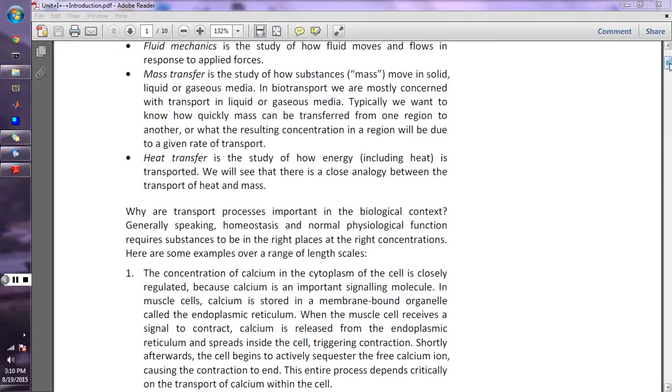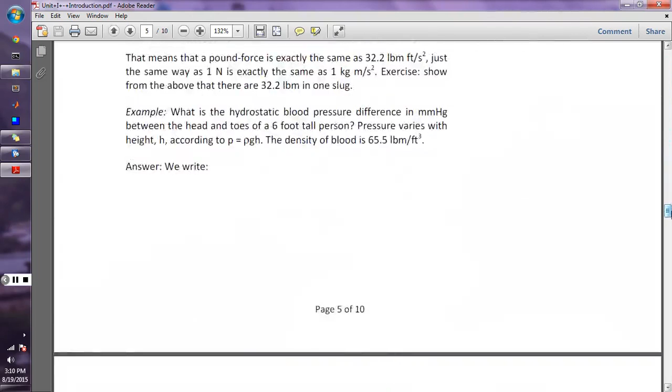Yeah, I'm doing it, yeah. Okay. All right. I was just doing it off my computer screen. Like, you can't see the annotations that you make, but you can see them on the camera, right? A little bit. I mean, not that well? Not that well, no. Oh, really? Yeah. Oh, okay. Yeah, I didn't do very much annotation yesterday, so maybe I'll try to do a little bit better job of that today.

Because I mean, it worked really well, I think, last semester when we did it from your tablet, but I feel like right now it's really far away. Yeah, actually, I'm not that crazy about this room. There's this thing that's kind of like a barrier between me and the students, I feel like, which is a little bit weird. Well.

It's just like tensors. Right. Must love tensors, right? They're useful. Actually, this is about as far as we're going to talk about tensors in this class. And that's about it. But for biosolids, trust me, we're going to talk more about tensors.

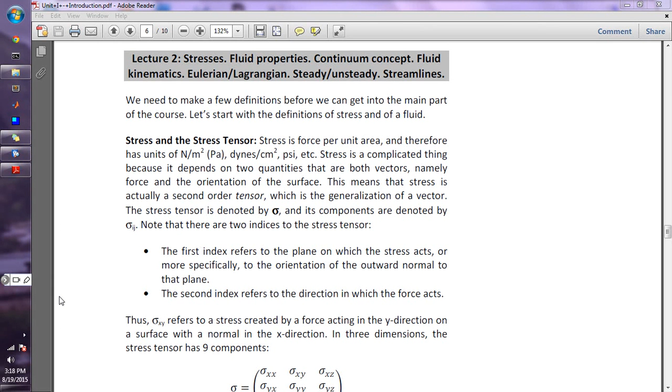Okay? So right away, we can kind of subdivide this stress tensor into 2 parts. The first part are these guys here. Notice that they have the same subscripts, x x, y y, z z. Those are stresses where the force and the area are in the same direction. And we call those normal stresses, because the force acts normal to the surface.

And then all the other guys, so these off-diagonal elements here, those are called shear stresses. And the idea is that the force is not acting normal to the surface, but it's acting tangential to the surface, right? So quick question. When I push down on this desk like this, is that a normal stress or a shear stress? Normal, right? When I slide my hand across the desk like this, normal or shear? It's shear.

And whenever you see something about a stress in this course, I want you to ask yourself a question. Is this a normal stress or a shear stress? Because they're different. Usually, in fact, for us, always, shear stresses have something to do with friction. All right? Normal stresses, not so much. Okay, questions about that? You experts on stress now? Stress tensor? Okay, awesome.

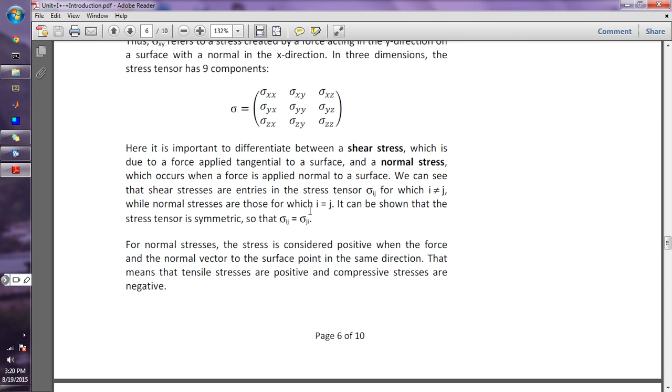Okay, what's a fluid? This is always a hard thing to define, right? The usual chain of logic goes like this. A fluid, what's a fluid? A fluid is something that flows, right? What's flow? Oh, it's what a fluid does. Perfect, that was easy, right? It's always good to have a circular definition. It's internally self-consistent, but ultimately unsatisfying.

Question, ma'am. Oh, I was going to answer. Oh, tell me. It sustains a rate of deformation. Sustains a rate of deformation. Explain that a little bit more, please. Oh, wait. Never mind, sorry. No, you're real close. You're doing awesome, actually. Not entirely sure how to. Okay. Anybody know? I mean, it's kind of up here, right?

So inherent in the idea of a fluid is the idea of shear stress. All right? And here's what I want you to think about. And we're going to kind of draw a distinction between solids and fluids here. So anybody have a book?

Students don't have books these days. I should have brought a book to class. I'm sorry, I don't have a prop with me here. Thank you. You don't want this back, do you? I would. Really? You shouldn't have given it to me.

Okay, here's a book. What I'm going to do is apply a shear stress to this book. Don't worry, I won't go full out on it. So how would I do that? I'm going to hold it on the bottom with my hand, put my hand on the top, and push my top hand in that direction and pull with my bottom hand towards my body. Okay. Now, what does the book do? It deforms a little bit, right?

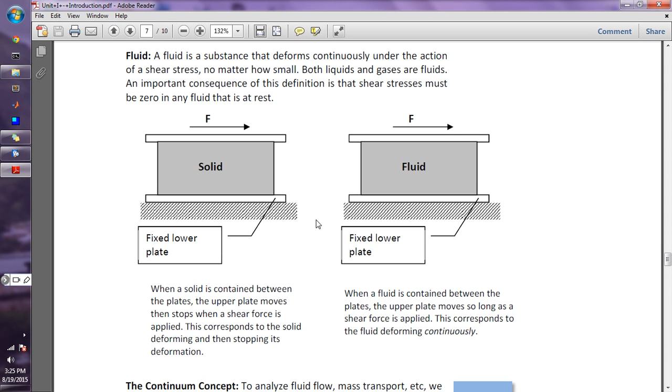Sir, are you good? I'm good. Excellent. I'm delighted to hear that. What does your shirt say? Hamburgers made of what? Where'd you get that? A fine emporium.

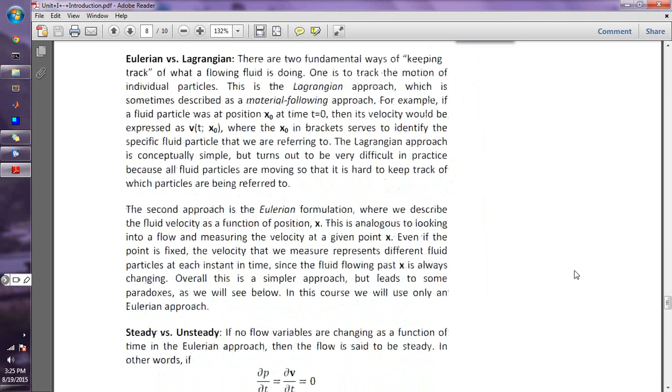When you see things with little blue stuff on the right-hand side, that means that's something that I expect you to read, but we're not going to talk about it in class, okay? Because we just don't have enough time to do quite everything in class, and that's pretty simple, so you can read it. Okay, next idea that I want you to think about.

So there's these two famous dudes, Euler and Lagrange, and they were actually pretty smart, and they did a lot of stuff in mechanics, but they had slightly different worldviews. You know, it's like taste great, less filling. I don't know if you've ever seen those ads. Kind of a fundamental dichotomy here. And this relates to two ways of looking at the world and specifically looking at fluid flow. So let me tell you how Lagrange looked at things.

The way of looking at things according to Lagrange is called the Lagrangian approach, right? Lagrange said, let's say that I'm standing next to a river, and I want to study the motion of fluid in that river. What I'm going to do is walk along beside the river at the same speed as the water in the river, and I'm going to look over, and I'm going to judge my speed so that every time I look over, I see the same little chunk of water. Could you do that? Yeah, it might be tiring depending on how fast the river's flowing, but it's possible, right?

That's what we call the Lagrangian way of looking at things, or the particle following. We're actually following particles along. Right. Euler said, no way, I'm not doing that. What I'm going to do is I'm just going to get out a lawn chair and sit at the side of the river and just look at one place in the river. Now, that's called a space-fixed way of looking at things, because I'm always looking at the same location in space.

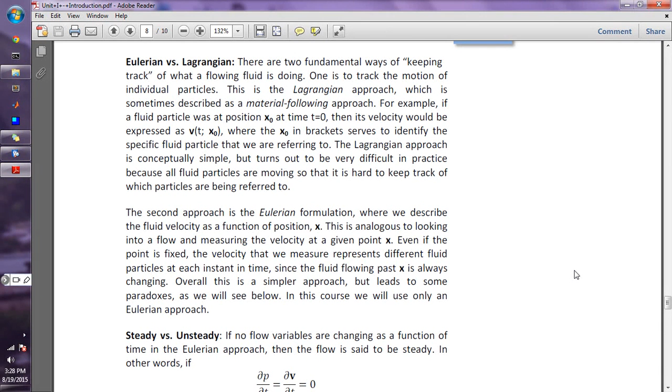And that Eulerian Lagrangian thing is going to mess you up so bad you can't believe it. Right? It's like your brain is going to catch on fire for the first 3 weeks of this class over Eulerian versus Lagrangian. And you don't believe me now, but you will in about 3 weeks. Okay? Because there's some weird stuff that happens there. Let's just kind of skip to the weird stuff here.

Suppose that I have a tube which has a nozzle on the end. All right, so it's fat on one side and thin on the other side. Right? And I am pushing water or something like that through this tube. Right? And I'm going to push the water through steadily. Now, steady in the Eulerian sense means that nothing changes with time. Is that a good definition for steady? Nothing changes with time in the Eulerian sense.

So that means that I can look at the water, I look away, I look back, and it looks exactly the same. Same temperature, same velocity, same acceleration, same everything. That's steady in the Eulerian sense. All right, nothing tricky there, at least doesn't seem like it. Right. Now here's where the weirdness comes in.

So I'm going to push this water through this nozzle steadily. Right. So how would I do that? Oh, I don't know. I'd hook it up to the tap and open the tap and not change the setting on the tap, and I'd hold the nozzle and the water would shoot out. It's not a real exotic experiment. Okay? Now I'm going to ask you to believe me on this, but just trust me.

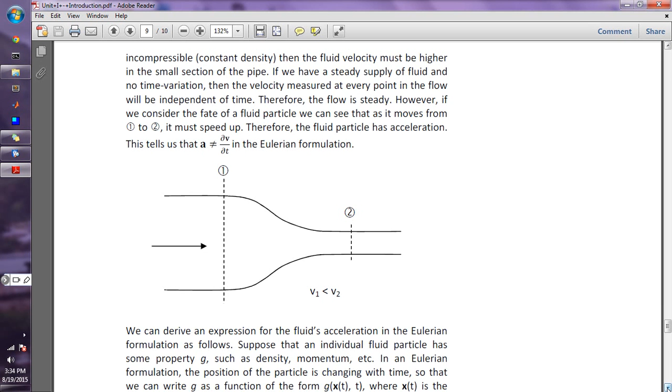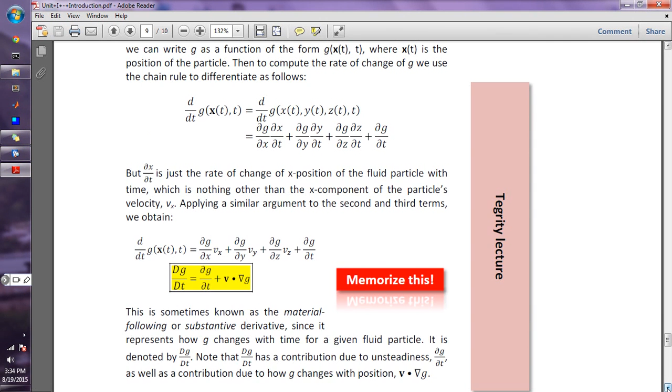Here's a Tegrity lecture. You should check it out. It's awesome. This is about how you calculate the time rate of change of something in an Eulerian representation. So the time rate of change of g has the partial of g with respect to time, but then extra stuff. That's the extra stuff that makes acceleration not equal to dv/dt, right? What else? Something on streamlines. You should read that too. It's really fun. Okay.

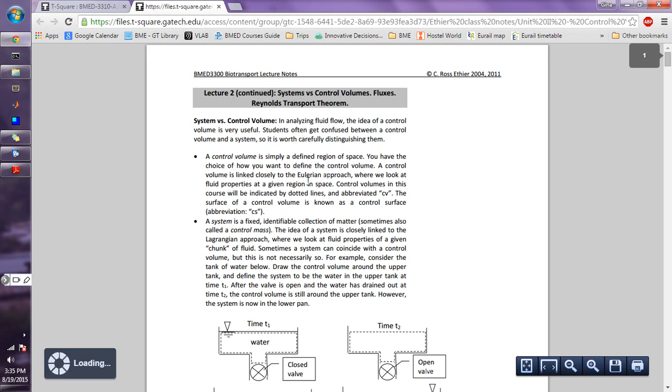Section 2 of the notes. System versus control volume. Anybody know what a control volume is? Ever heard that term before? Sir, have you heard that term before? Control volume? No. Okay. Control volume is a fixed region in space. That's it. Simple. We abbreviate control volume by CV because it's way too long to write out control volume all the time. And the surface that encases the control volume is called the control surface, and that has the abbreviation CS. And we show it always as a dotted line like that, or dashed line. Right?

Who chooses the control volume? You do. You are the bosses of the control volume. Don't take any guff from the control volume. Right? The control volume that you choose depends on the problem that you're trying to solve. So I have good news and bad news about control volumes. The good news is there is no such thing as a wrong control volume, in the sense that if you choose the wrong control volume for a problem, at the end of it, you will be able to show that 0 equals 0. That's not wrong. On the other hand, you kind of already knew that, right?

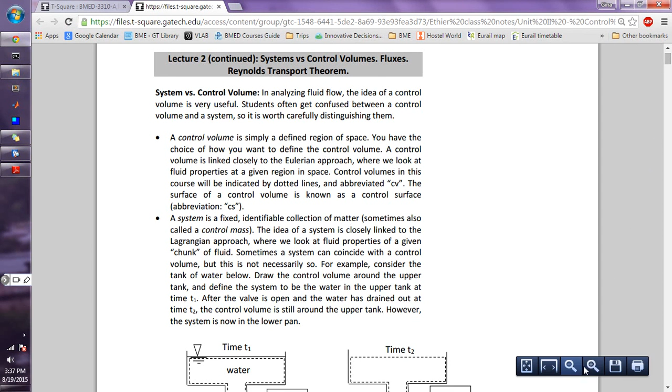Oh, I should stand in front of the camera. Sorry. Sorry, Gina. Sorry.

Well, no. Yeah, but that's for deciding steady versus unsteady, right? But what's Eulerian? Eulerian is a space-fixed representation, right? I am going to look at one region of space in the Eulerian way, and a control volume is a fixed region of space. So control volumes and Eulerian kind of go together like, you know, PB and jam. Like it's two sides of the same coin.

Okay? There's a different way of thinking about things, which is a system, sometimes called a control mass. And that doesn't have anything to do with a region of space. It has to do with a defined collection of matter. So first of all, who chooses the system? You do. You're the boss. A lot of responsibility here. Not only are you the boss of the control volume, you're the boss of the system too, right? That's pretty awesome, right? So I could define the system to be this pen, right? I could define the system to be this leftover plastic bag, whatever I want.

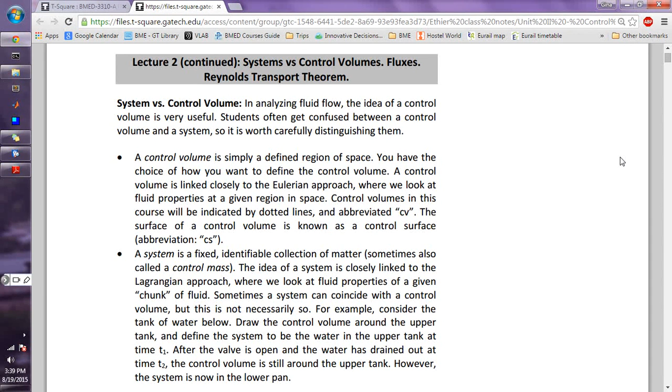Okay. Now, the system could coincide with the control volume, or it might not. And let's do a simple little experiment here. I have a tank with water in it. And this is a valve here, this thing with an X, and that valve is closed. What I'm going to do is define the control volume as shown by that dashed line there. And actually, control volumes, remember, they're 3D, so it's like into the board too, but this is a cross section. The system is the water that's in that top tank.

Is that legal? Am I allowed to do that? Sir, am I allowed? Stop me if I'm doing anything wrong. Yeah, sure, why not, right? You can choose whatever you want. So I'm saying I'm going to choose that dashed line to be the control volume and the water to be the system. Okay? That's just my choice today. So that's at some initial time.

Then what I'm going to do is I'm going to open the valve. Guess what happens? Well, you don't have to take fluid mechanics to know that the water runs out of the top tank into that pan at the bottom. Right? So where is the system now? Well, now the system's in this bottom pan here. The control volume hasn't changed or moved, but the system has. What has happened to the mass of the system? Has the mass of the system changed? No. Same water, right? It's just in a different place.

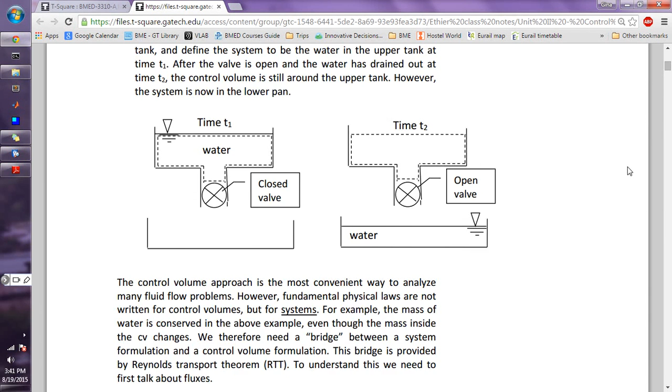Has the mass in the control volume changed? Yes. Oh, bad news number 2. Mass is not conserved in an Eulerian representation. Actually, I just lied to you. Mass is conserved, but you don't know how to conserve it. Like, can you really destroy or create mass? No. Well, you can with a nuclear reaction, right? But the good news is that we don't typically have that in BME, at least at body temperature and pressure and stuff like that, right?

So for our purposes, yeah, mass is conserved, but we don't know how to conserve it in an Eulerian representation, and we are going to use Eulerian representations pretty much all through the year, because that's how you do fluid mechanics. So we're going to have to figure out how to conserve mass, and in doing that, we're actually going to figure out how to conserve other stuff too. Because if you can conserve mass, you could balance things like momentum, which is going to turn out to be useful, and energy, and actually you could conserve whatever you want, but those are the ones that we care about, all right?

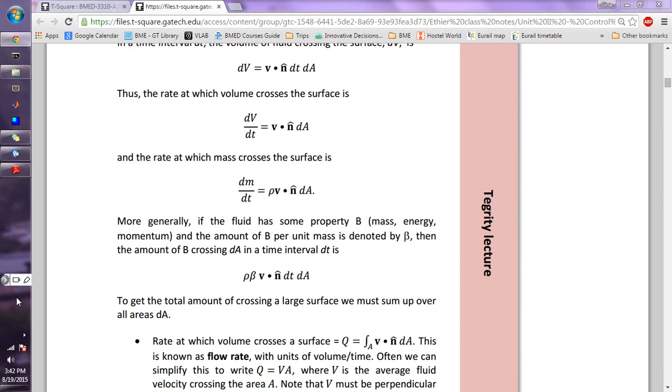So I hope that you see that inherent in that little example with the tank, the reason that the mass in the control volume changed was that mass crossed the control surface. Like when I opened that valve, the water drained down and it crossed that dashed line. If that didn't happen, then mass would have been conserved in the control volume, right? So somehow I need to have a way to represent how things cross surfaces. And I need to do that in math, because at the end of the day, we're going to want to get to math, right?

Because we need that to solve problems, because we're engineers. So the way that we represent how things cross surfaces, or more specifically, how quickly things cross surfaces, is the idea of a flux. And so here's what I'd like you to think about. And there's a lecture on this, but I found this is a really tough concept for students, and it's really important. So I'm going to spend a couple minutes in class to go through this, and then you can watch the lecture if it's not clear.

So I want you to think about a little piece of area. So I'm going to say that that area is dA. So I'm trying to draw kind of a little ellipse in 3D, right? Area of what? I don't know. I don't care for right now. Could be part of the control surface. Could be whatever you want. It's just like some little chunk of area, right? Part of a surface. And I'm going to say that the normal vector to that area is n hat. Right? Now we have the idea that areas have direction. So I got to take account of that.

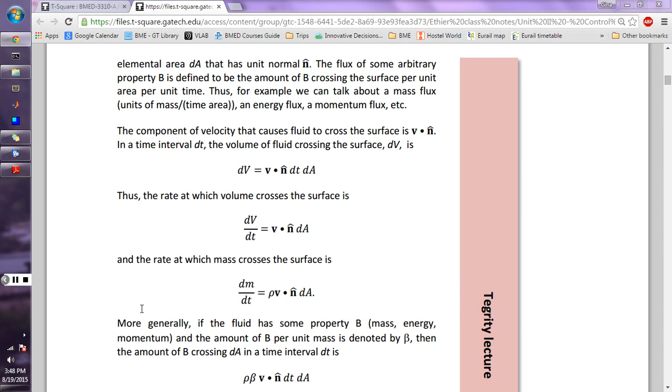Your dentist is going to have something to say to you. Okay, I don't want to get too personal here. When you brushed your teeth, what did you do? Well, you had a tube of toothpaste, right? And that tube of toothpaste has a little hole in the end. And you squeeze the tube of toothpaste and the toothpaste comes out in kind of a cylindrical shape, right?

I want you to imagine that the little hole at the end of the tube of toothpaste is the area dA. And the fluid that's crossing that surface area dA is the toothpaste. Right? So if I'm only thinking about the component of velocity which is normal to the surface, like this, then it's like I squeeze a cylinder of fluid out through that area dA. And if I knew the volume of that cylinder of fluid, I would know how quickly volume was crossing the area.

Now, what is the volume of that cylinder? Well, the volume of a cylinder is the cross-sectional area, that's dA, times the height of the cylinder, or the length. What's the length of the cylinder? Well, it's the velocity times the time that I'm squeezing the tube. I squeeze for a longer time, I get a longer thing of toothpaste coming out, right? So specifically, if I draw it out, I have something that looks like this. So there's my cylinder of toothpaste or fluid.

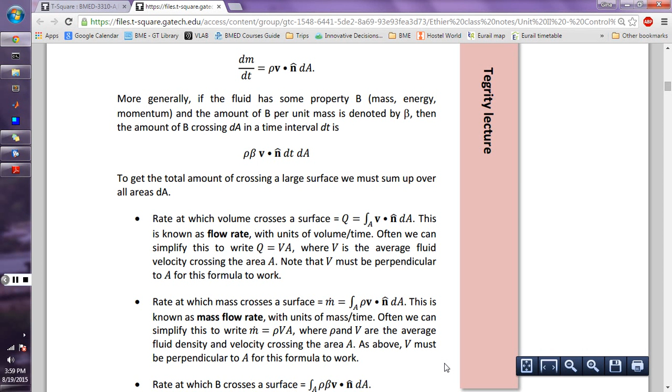Or, in general, for some arbitrary b, it's that. Rate at which b crosses the surface is the integral over the surface of rho beta v dot n dA. Congratulations, you now know how to calculate how quickly something is crossing a surface.

Sir. It got into the basement because, remember, we turned it into a rate. Remember I took that dt into the basement on the left-hand side? Yeah. I'd hate to have an extra dt floating around. That'd just get in the way, right?

Please be careful. There's one thing about this stuff. Okay, so first of all, does anybody here like integration? Oh, awesome. 1, 2. I love integration. Most people don't, right? Because it's hard. When you have to do one of these integrals, which you will have to do at some point, you need to ask yourself a simple question. What is the A that I'm integrating over? Because we will do problems, like real soon, where it's not so clear what the right A is.

So every time you see a Q, every time you see an m dot, I want you to ask the question, what is the area? Please, please, please, ask that question. What is the area? If you get the wrong area, you're going to get the wrong m dot, right? For sure, then you're sunk. Do not pass go. Do not collect $200. Right? So ask, what is the area? Questions?